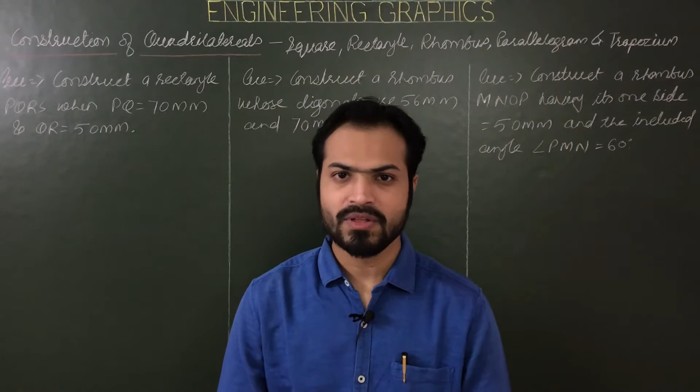So first of all, what is a quadrilateral? Quadrilateral means a figure of four sides, a figure in which the number of sides is 4. Under quadrilaterals we have square, rectangle, rhombus, parallelogram and trapezium.

A square has all four sides equal and all four angles are right angles. Right angle means 90 degrees. The diagonals are also equal and bisect each other at right angles. So square means all four sides equal and all included angles equal to 90 degrees.

Then rectangle has opposite sides equal and all four angles right angles, but all sides are not equal. Equal opposite sides and all angles are 90.

Next, rhombus. A rhombus has all four sides equal but none of its angles is 90 degrees. Greater than 90? Yes, possible. Less than 90? Again possible. But 90? No, not possible. And one more thing, in case of rhombus, opposite sides are also parallel.

Then next, parallelogram. Opposite sides are equal and parallel to each other, but angles are not 90. Opposite angles are also equal, but other than 90.

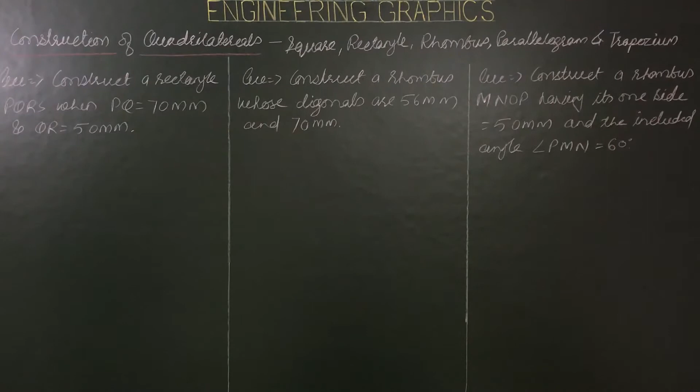Now construction work. First is a square, but we already covered how to construct a square in the previous class, so we will start from rectangle. First question: construct a rectangle PQRS when PQ equals 70 mm and QR equals 50 mm.

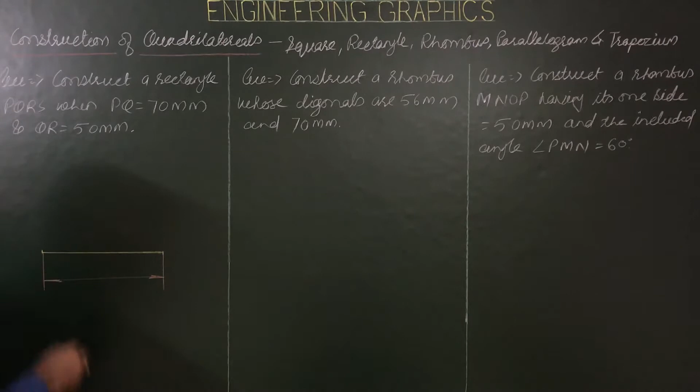So first of all, draw the first side of length 70 mm, and we have to show its length also. Draw extension lines perpendicular to the base and a dimensioning line parallel to the base and write its length 70. This is PQ, first end P, second end Q.

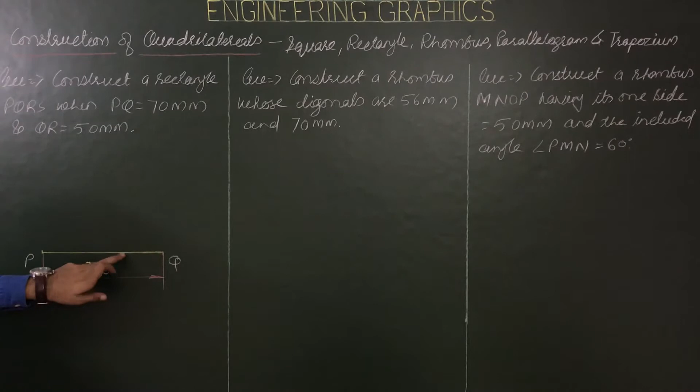Then QR is 50 mm. QR means the second side perpendicular to the first side, of length 50 mm. So draw the second side perpendicular to the first side with length 50 mm. Now this corner is point R.

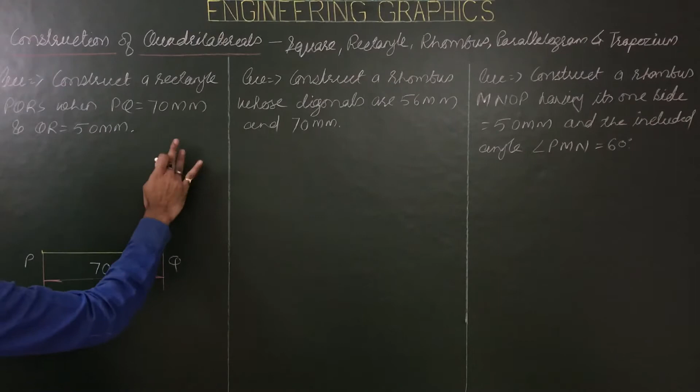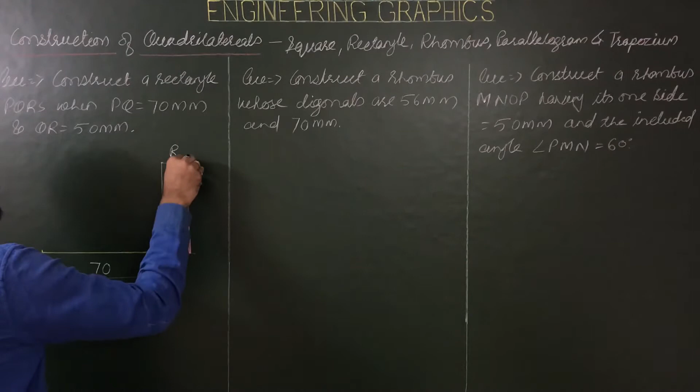Again we have to show its length. The length or height of RQ is 50, so we show this length also as 50. Now we have 3 points. What to do for construction of the rectangle?

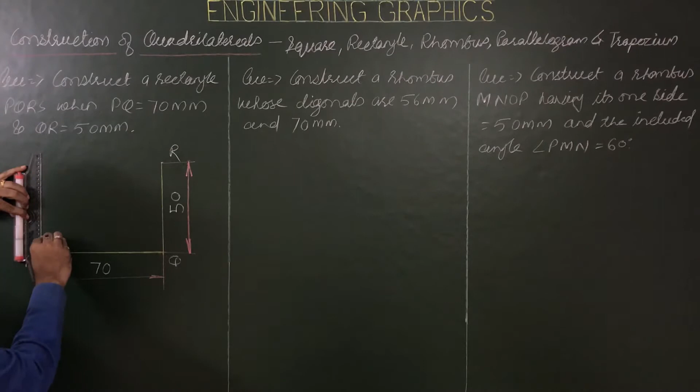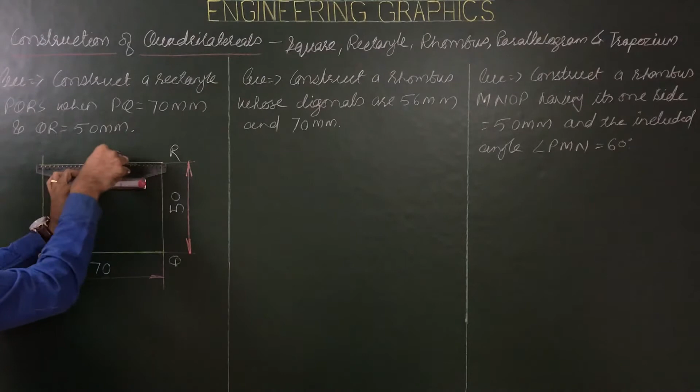Draw lines parallel to PQ from R and parallel to QR from P, or, since all angles equal 90, from P draw a line perpendicular to PQ, and from R draw one more line perpendicular to QR, because the basic concept is that all four angles must be 90.

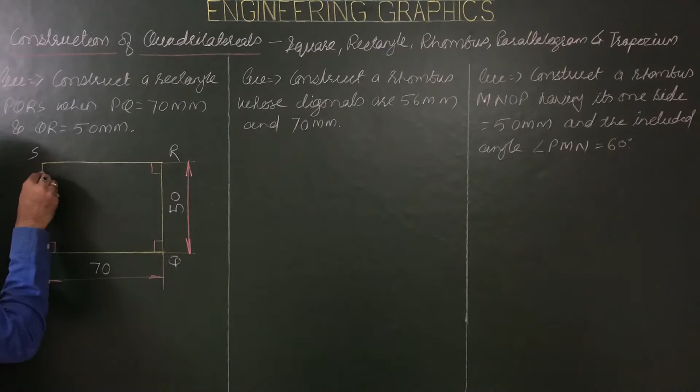So first draw the first side, then the second side, then from each corner another perpendicular, or simply draw a line parallel to PQ from R. We'll get this point. This is PQRS, so this must be S. And we have to show each angle is a right angle using the right angle symbol.

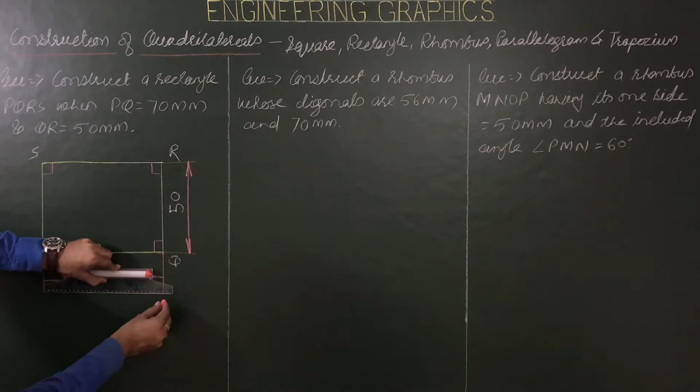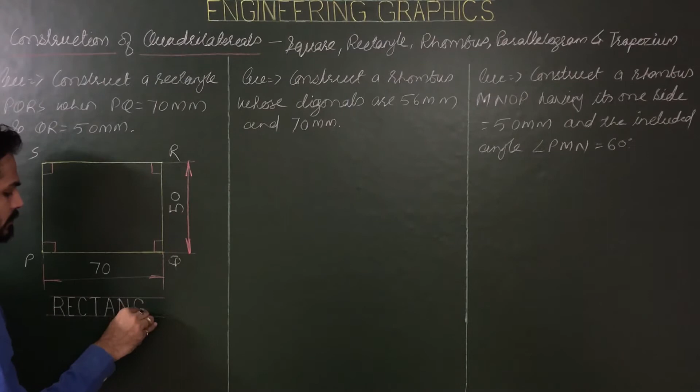Then if you want, write its heading, rectangle, with letter height 10 or 5 mm, or you can go for 8 mm also. Next, rhombus. Construct a rhombus whose diagonals are 56 mm and 70 mm.

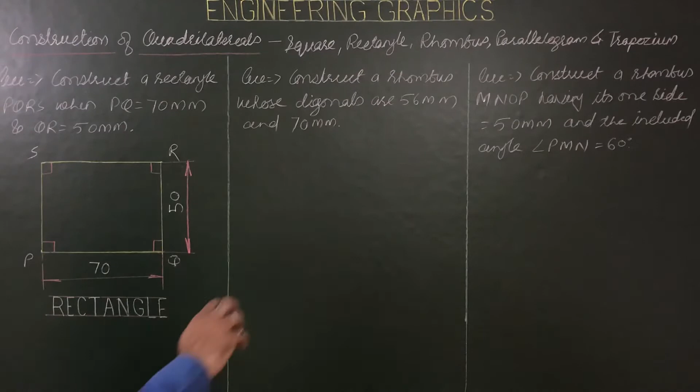So the first diagonal is 56 mm and the second is 70 mm. For a rhombus, diagonals are perpendicular bisectors of each other. The 70 mm diagonal is the perpendicular bisector of the 56 mm diagonal, and vice versa.

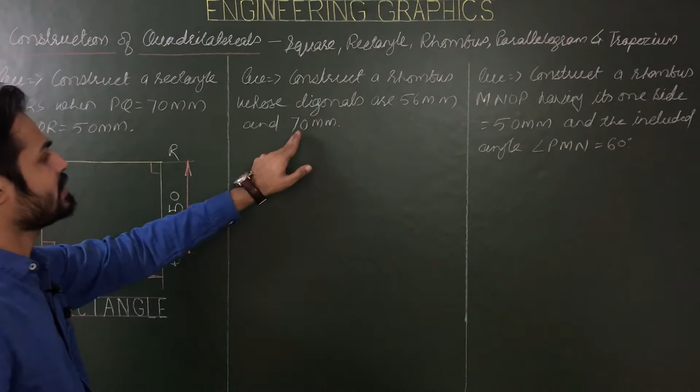So draw the first diagonal of length 70 mm. Then construct its perpendicular bisector using any suitable method. You can use the arc method: with any arc length greater than half, greater than 35, find 2 points and join them to get the perpendicular bisector.

Another method is to mark the midpoint of this 70 line, 35 from this end or 35 from that end. From this midpoint draw a perpendicular of total length 56.

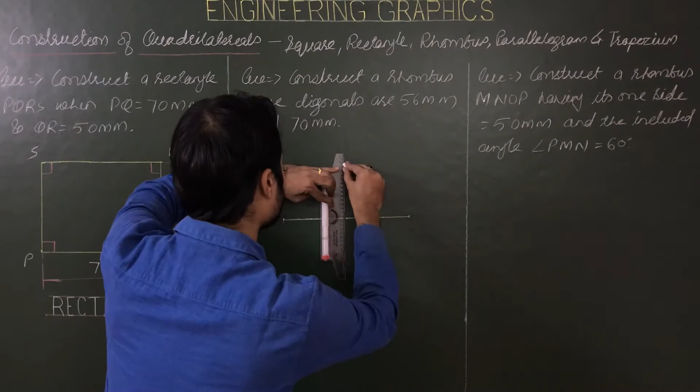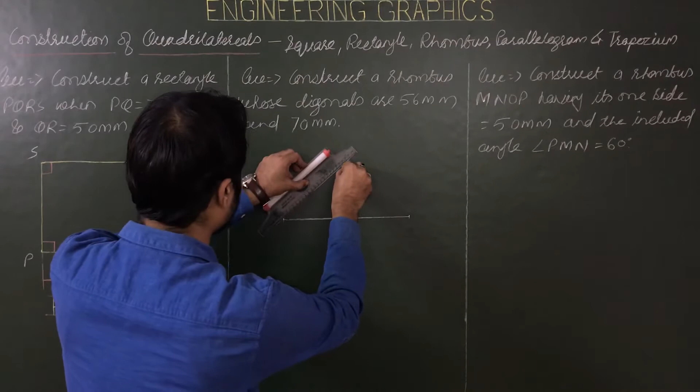So if total length is 56, then half of 56, 28 up and 28 down. So these are 4 end or corner points of this rhombus. Then what to do? Join all 4 corners with dark pencil and then do proper dimensioning.

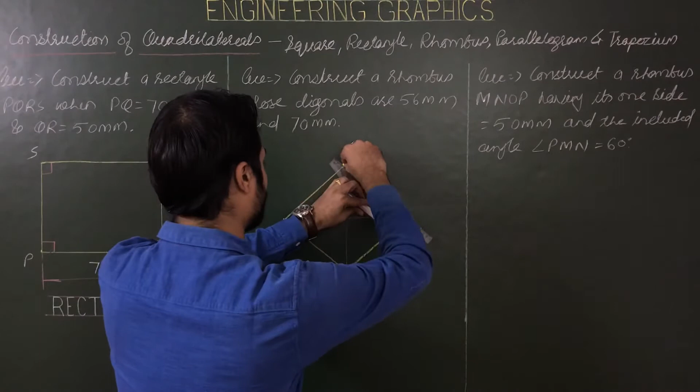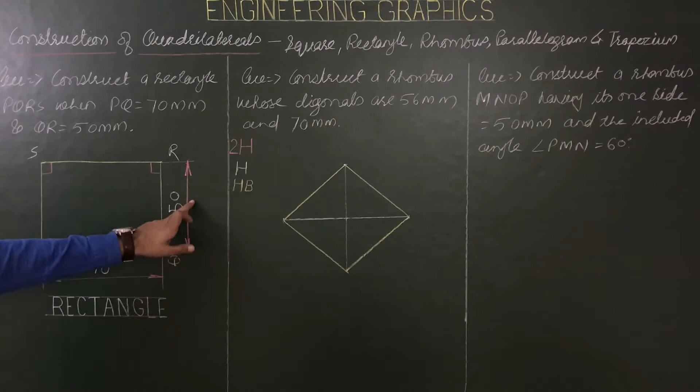One more thing, here I am using light pink chalk for 2H pencil or light work, then white chalk is for H pencil medium work, and for HB or dark work color is yellow. So these are color codes. For 2H, light or pink, so these are light work. H pencil is for all naming, medium dark work, and HB is for final work, final or dark work.

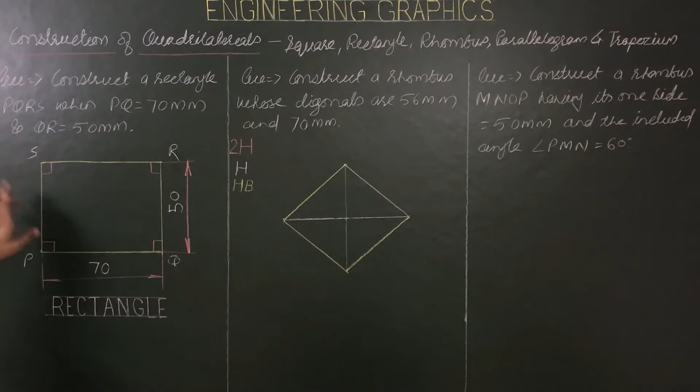Now for dimensioning, what to do? Draw extension lines perpendicular to the side and dimensioning line. Dimensioning line parallel to that side. Extension line, and dimensioning line. Dimensioning line always parallel to the side, and extension line always perpendicular to that side if possible. In extreme cases, we'll discuss what to do, what to modify.

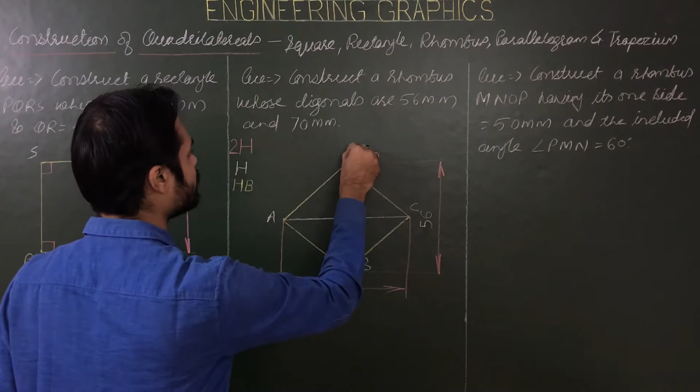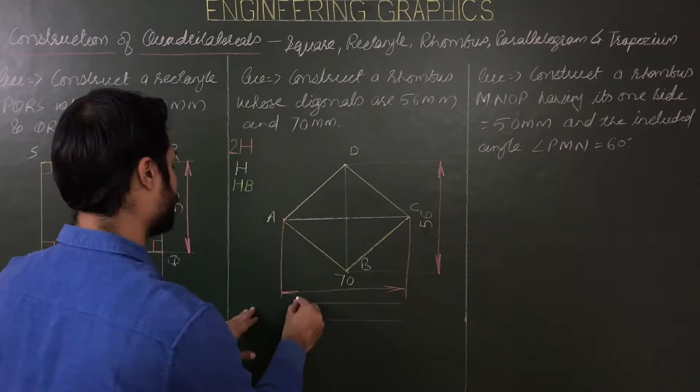Length is 70 and here the length is 56 mm. 56. And naming, say A, this point is B, this is C, and this is D. And last heading, rhombus. Right. So this is first type of rhombus.

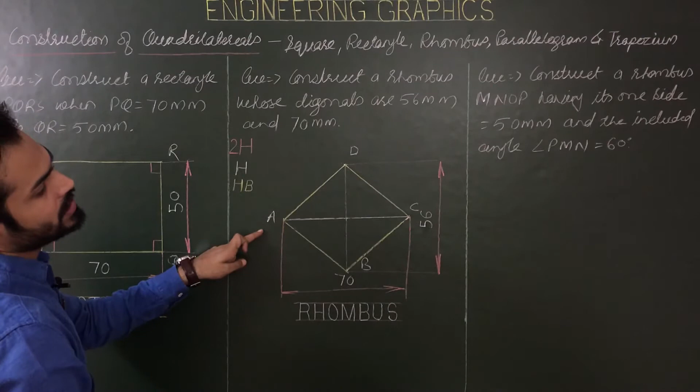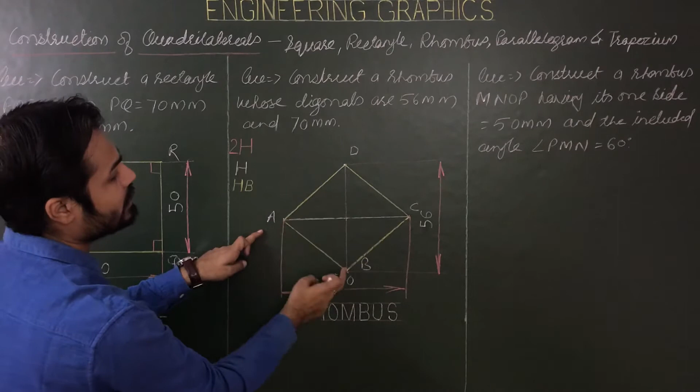The next, construct a rhombus MNOP having its one side equal to 50 mm and the included angle PMN equal to 60 degrees. So for example, say this is M, N, O and P. Side length is 50 mm, 50, 50, 50, 50, and the included angle PMN. This angle is 60. So this angle is 60, length is 50 mm, and we are required to construct a rhombus for this case.

So what to do? First of all, draw first side 50 mm long and do dimensioning for this side. This is 50. Then angle, first angle, say this corner is M, N, this must be somewhere here, and P. So angle PMN, this angle is 60. So draw another line at an angle of 60. This is 60.

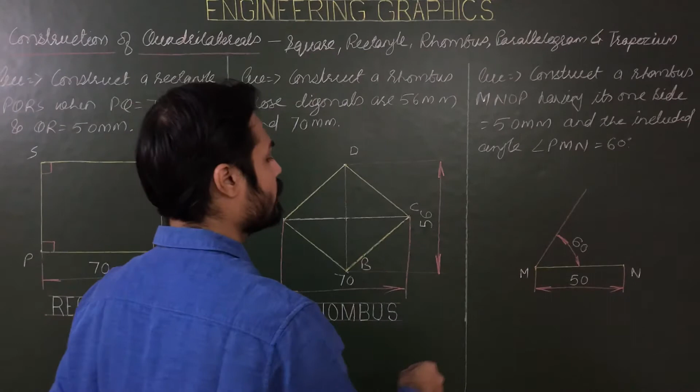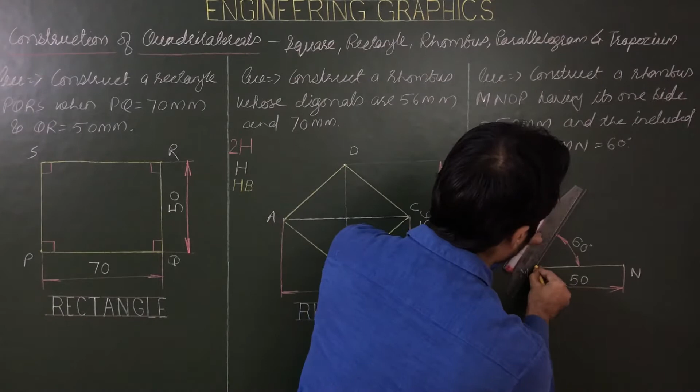Degrees, right? So the first side MN of length 50 mm, then angle at M is 60. So draw another line at an angle of 60 from M. Then we have to mark this length of 50 along this side. So mark length of 50 mm along this line. Now we have MN and MP. What next?

Then we have first option: from N as center and NO as 50, arc length is 50. Arc like this, and from P arc like this will do. Second is draw line parallel to MN from this point, line parallel to MP from N. Again we'll get this point O. And third option, try to calculate this angle. 60 is the angle, so 180 minus 60 will be 120. So measure of this angle will be 120 at N.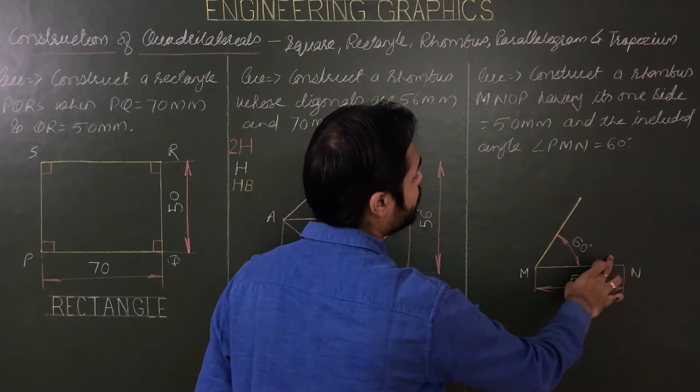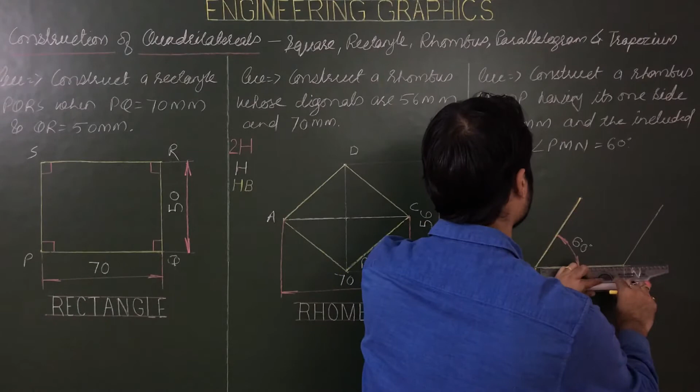So these are three methods for construction. You can go for first method, arc method, second method, parallel method, or third method using angle. After calculating that angle, you can complete your rhombus MNOP. So in this rhombus, angle PMN is equal to 60 degrees, and MN equals NO equals OP equals PM equals 50 mm.

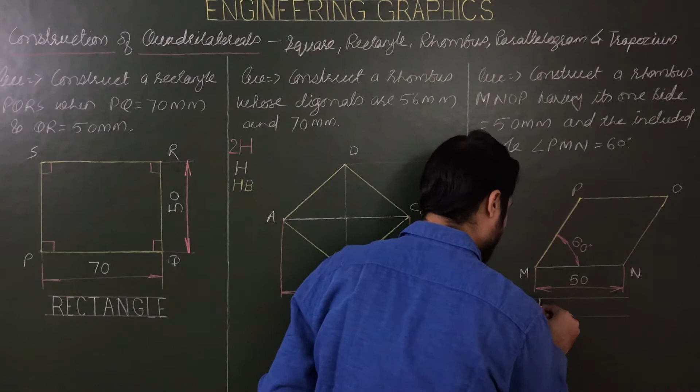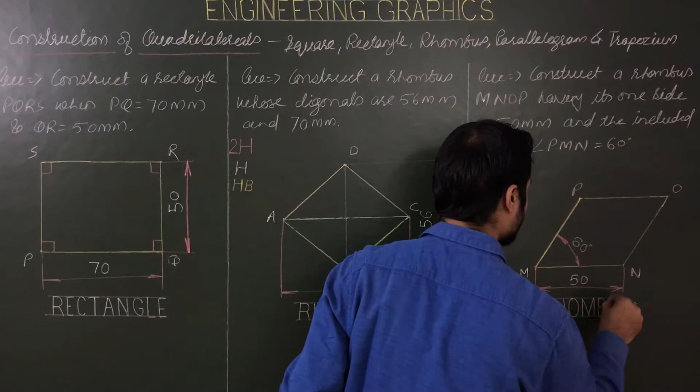Again, for naming, please follow all rules of single stroke letter writing, and if possible write rhombus like this in a letter height of 10 mm, 10 or 5 or 8. Better you take 10 mm for writing work.

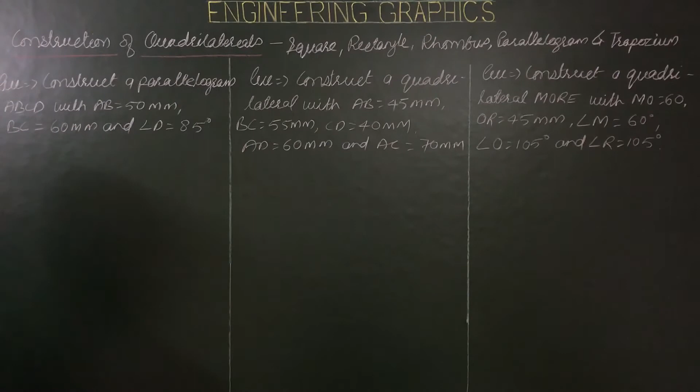Next question, construct a parallelogram ABCD with AB equal to 50 mm, BC equal to 60 mm, and angle D is 85 degrees. It means first side of length 50, second side of length 60, third side again 50, fourth side 60. Say this is A, B, C, D. AB of length 50, BC of length 60, CD and DA. Angle D is 85, so opposite angle B will also be 85. And angle A will be 180 minus 85 equals 95.

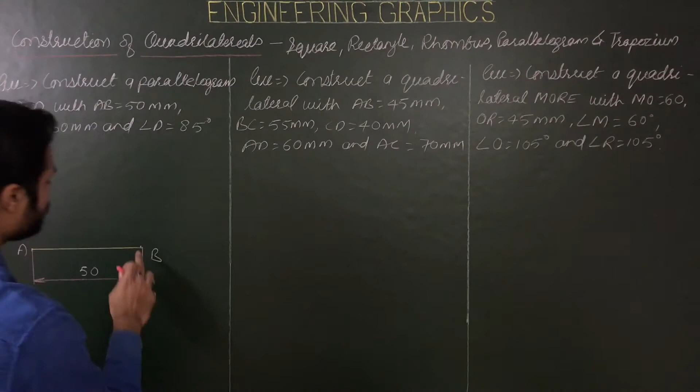So what to do? Draw first side AB of length 50 mm, this is A, and this point is B. Do proper dimensioning and write its length 50 mm. Then from second corner B, we know that the angle is 85 at D, so the angle must be 85 at B. So from B draw another line at an angle of 85. Say this is 85. I am not going to check this angle.

So this angle is 85 from AB, with reference to AB, and the length from B to C. From B to C the length is 60. So from B mark a length of 60 mm for C.

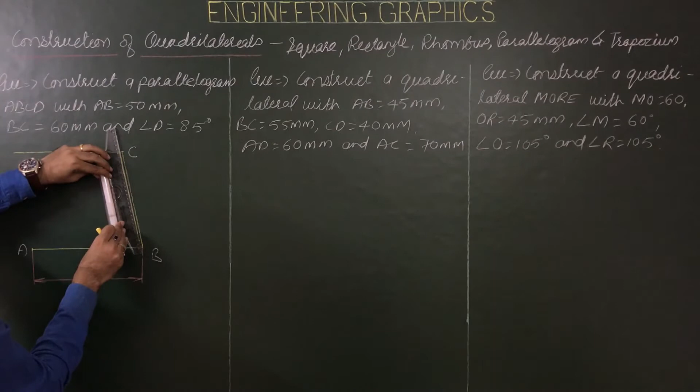Now draw lines parallel to the first side and parallel to the second side. So draw a line parallel to AB from C, because in this question we are trying to construct a parallelogram. Parallelogram means parallel lines. So draw a line from C parallel to AB, and from A parallel to CB.

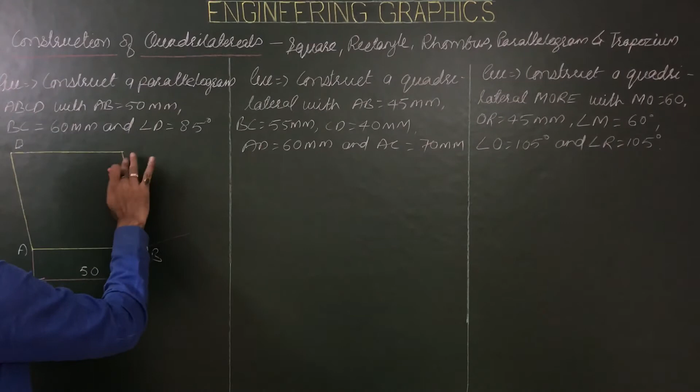Yes. And these corners are A, B, C, and last is D. This corner is D. And we have to show its length also. So for dimensioning, draw perpendicular to this side, or perpendicular of BC, like this, and the length is 60 and this point is C, okay, acceptable.

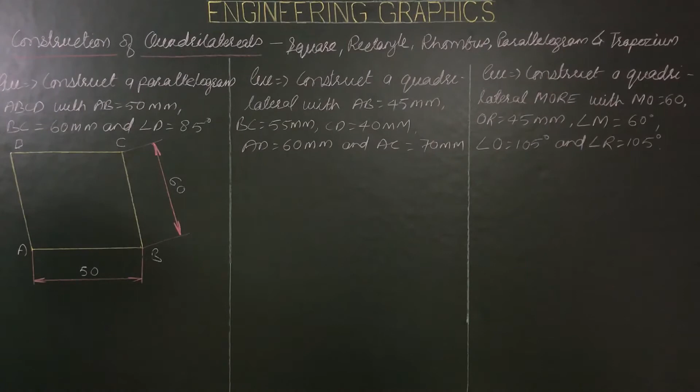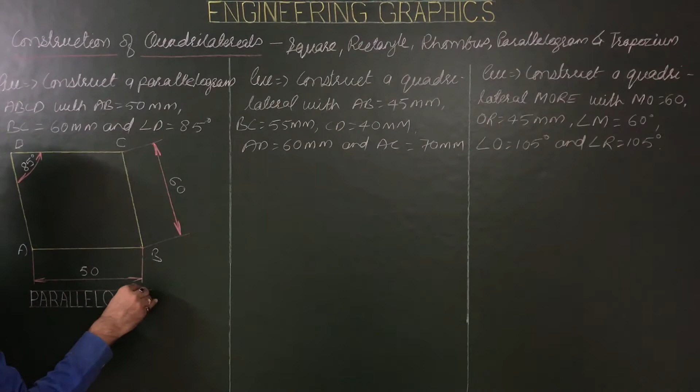And the angle at D is 85 degrees. Now naming the parallelogram. So write parallelogram. So this is the final answer.

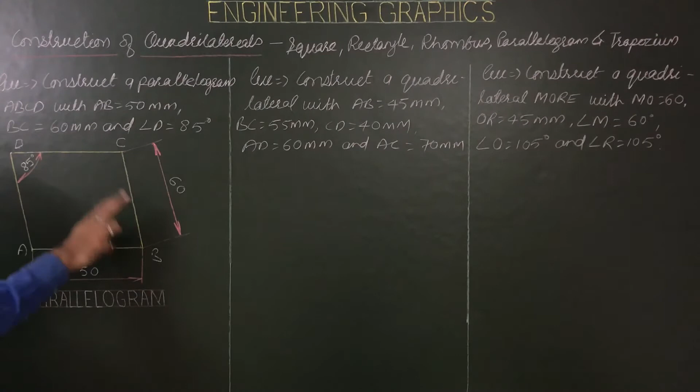Parallelogram of side AB equals 50, BC equals 60, and angle D is 85. If D is 85, B must be 85. And what about A and C? Angle A equals angle C, which will be equal to 180 minus 85 equals 95.

Now next, construct a quadrilateral with first side AB equals 45, BC equals 55, CD 40 mm, AD 60, and AC is 70 mm. So this quadrilateral is a combination of two triangles: ABC, first point A, second point B, third point C, and second triangle ACD. So please try to focus on the first part, first triangle ABC.

Do we have enough data for first triangle ABC? AB is 45, then BC is 55, yes, and CA is 70. So what to do? First of all, draw the first side of length 45, that is AB is 45 mm long. So draw AB of length 45 mm. So the length is 45, which we have to show here, 45 mm.

Then B to C, BC is 55 and A to C is 70 mm. So what to do? B as center and BC equals 55. From this point, arc of 55 mm for C, and then A to C is 70. Just a minute, from B, C is 55 mm and A to C is 70 mm. So the common intersection point is point C. A to C 70, B to C 55.

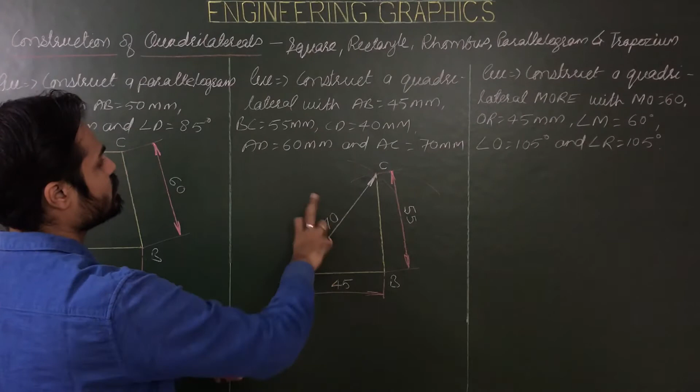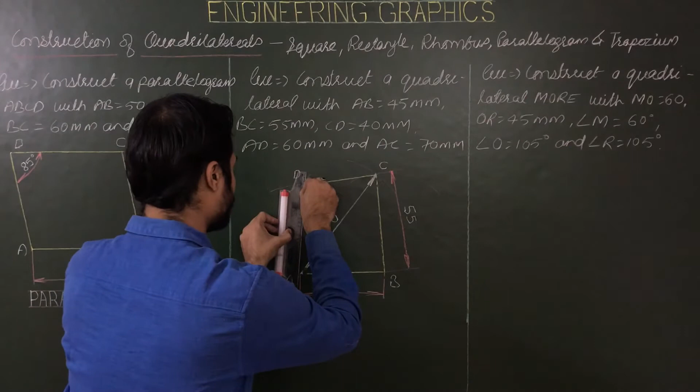Then from C to D is 40 mm, A to D 60 mm. So from C to D another arc, and A to D arc of 60. So A to D 60 is arc length, from C to D 40 is arc length. This is the last point D. Again what to do? Join C to D and A to D, and then dimensioning for CD and AD.

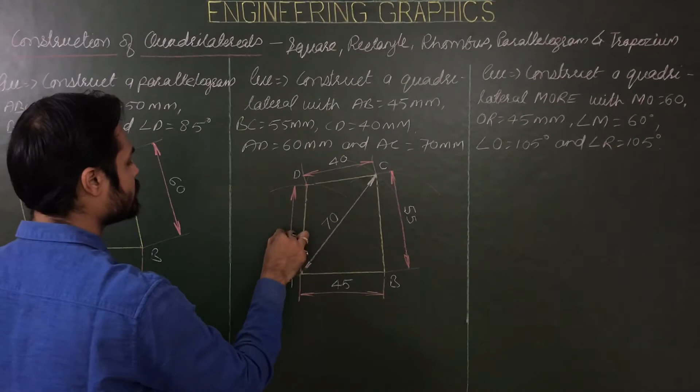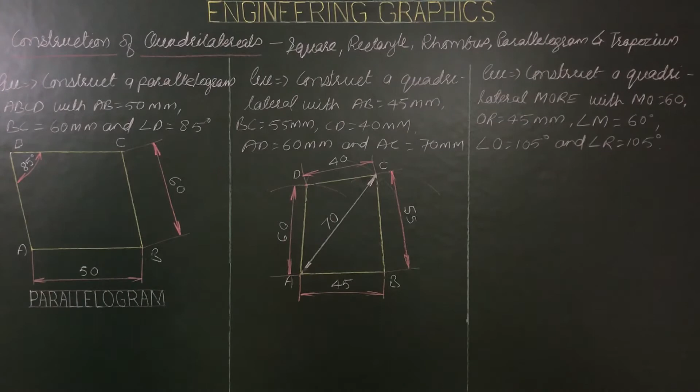CD is 40 and AD is 60. 40, 55, 70, 45. Yes. So this is the final answer. Quadrilateral AB 45, BC 55, CD 40, AD 60 and AC 70 mm. Last, write its heading: quadrilateral.

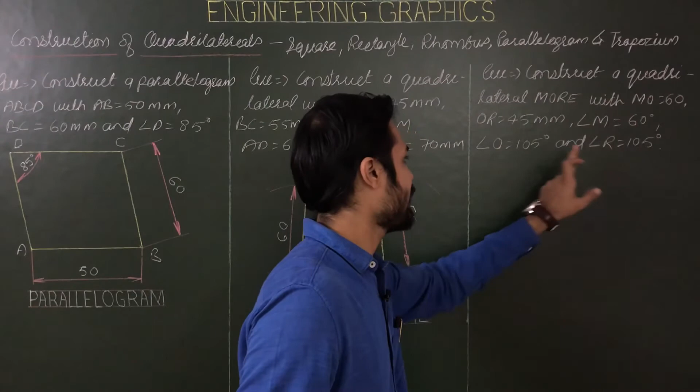Next question. Construct a quadrilateral MORE with MO equals 60 mm, OR 45, angle M 60, angle O 105 and angle R 105. So in this problem, two sides and three angles are given to us. So first of all, draw the first side MO of length 60 mm.

This is MO, M to O. Mark them, M and O. Then do dimensioning for MO. M to O is 60 mm. So write 60. Now from O, the angle at O is 105 and length OR is 45. So what to do? Better to go for the angle first. So draw a line for OR at an angle of 105.

This angle is 105 degrees. So from O to R. Now mark point R on this line, and the length is equal to 45. So again we have to show this length, line of length 45. So this is 45 mm, and the naming of this point is R.

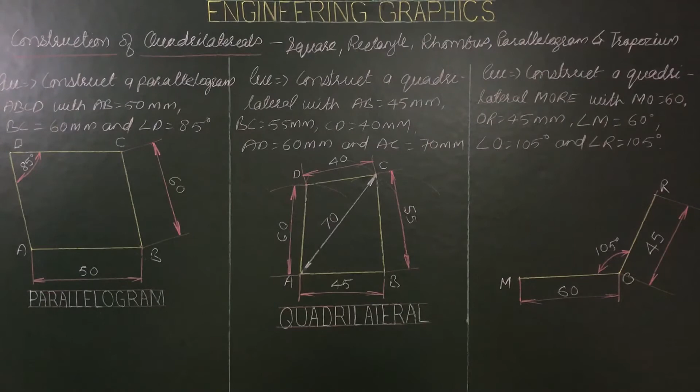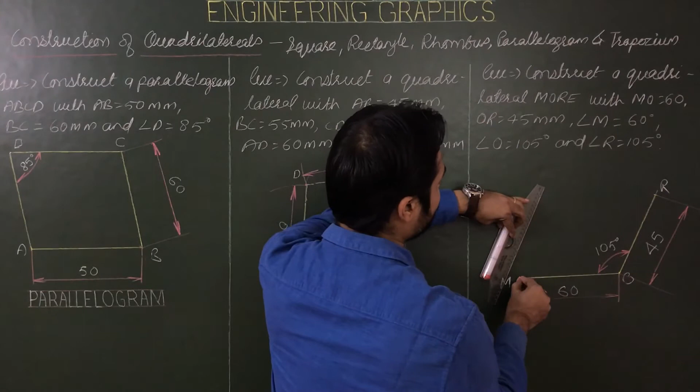Then we have angle O 105 done. Angle R is 105, and angle M is 60. So from point M, draw another line at an angle of 60. So this angle is 60 from this side, M to O. From this line the angle is 60. So draw an angle of 60

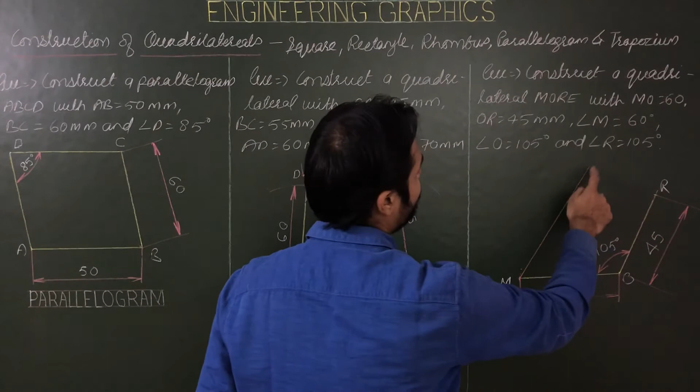degrees like this. And from R, another line at an angle of 105 from this line. So this is perpendicular, and after measurement please draw an angle of 105. This angle is 105. This is 105 again.

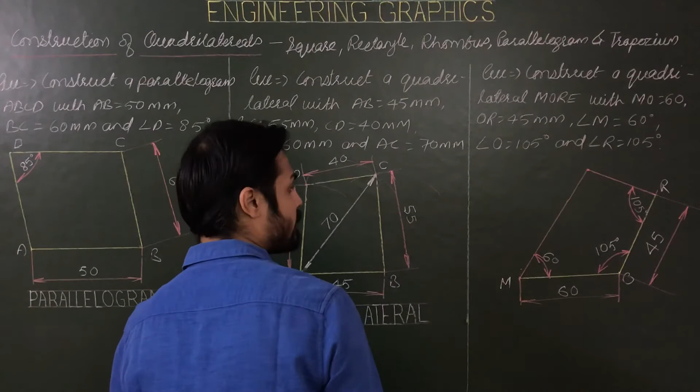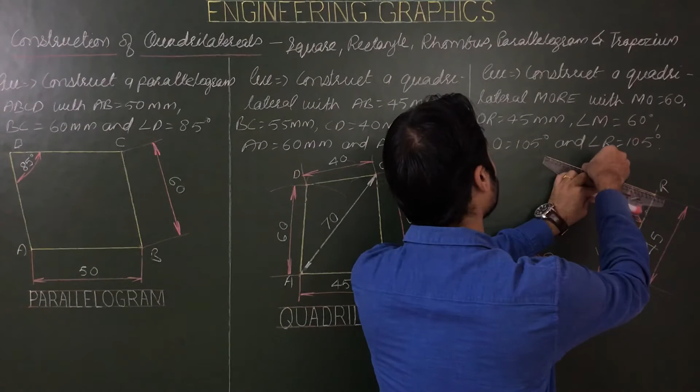105 degrees. And this is 60. Angle over here is 60. Now we have all four corners and all four sides, so you can use dark pencil for final outline. And the last point is M, O, R, and this is E.

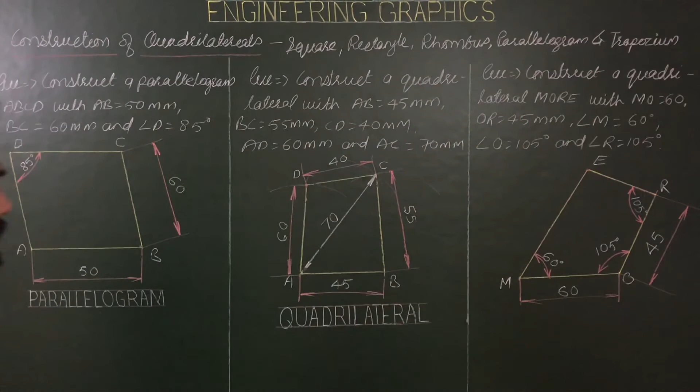So in this figure, MO is 60 mm long, yes. O to R 45, yes. Angle at R 105, angle at O 105, and angle at M 60. Angle at M is 60 degrees. Again, write its heading, quadrilateral. I'm not writing here because we have to repeat it, quadrilateral, for the last question.

Next question. Construct a trapezium ABCD having its sides AD equals to 30 mm, DC 25 mm, CB 35 mm, and the difference of parallel sides is 20 mm. Now, personally, for this problem, I don't think the data or given statement is enough. I think some extra data, some extra information is a must for solving this problem.

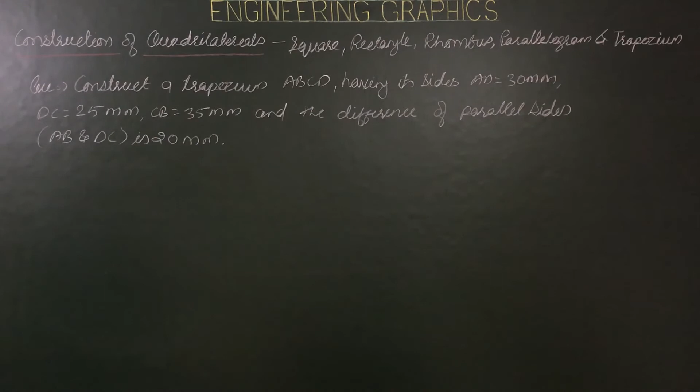So, assuming that AB and DC, these are parallel sides. One more thing, whether AB is greater than DC or DC is greater than AB. So we will assume that length of AB is greater than DC. So parallel sides are AB and DC, and AB is greater than DC. So now for solving this problem, first of all, calculate length of AB. Length of AB equals to the difference 20 plus length of DC. 20 plus 25 equals to 45.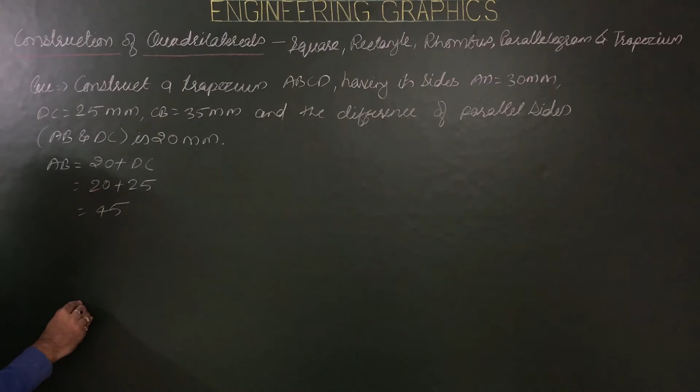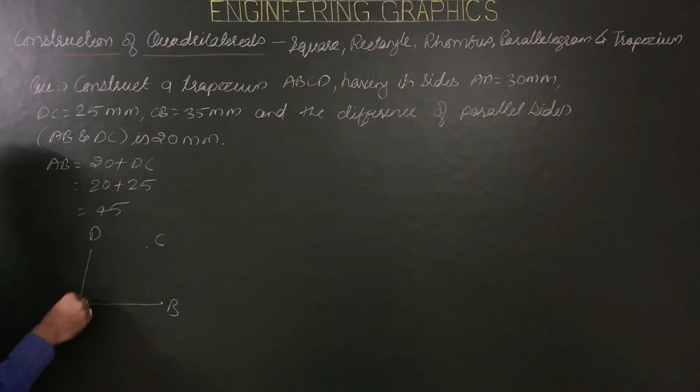Now AB and DC, these two sides are parallel in this trapezium, so we'll try to construct A, B, say this point is C, and say this is D, and this is the trapezium. Approximately this is the trapezium. So DC is parallel to AB. Now in this trapezium, one more thing, difference of AB and DC is 20. So if we locate that point E, this distance is 20, and this is 20, and this is total

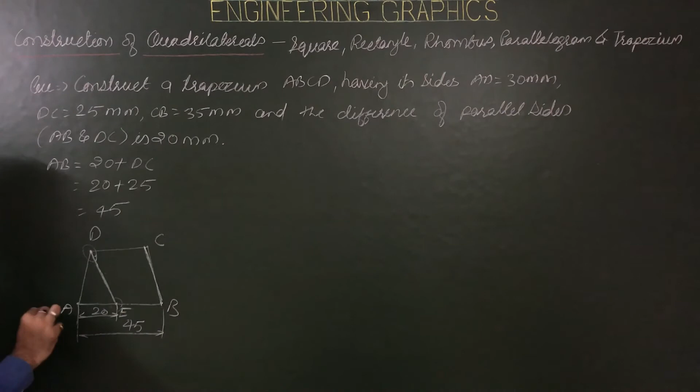45. Then according to the theorem of trapezium, if you draw a line from E parallel to CB, from E, this is the line, the common intersection point will be D. Or if we draw a line from D to the point at a distance of 20, the difference between these two sides, then this side and side CB will both become parallel. So using this theorem, now we have to construct this problem.

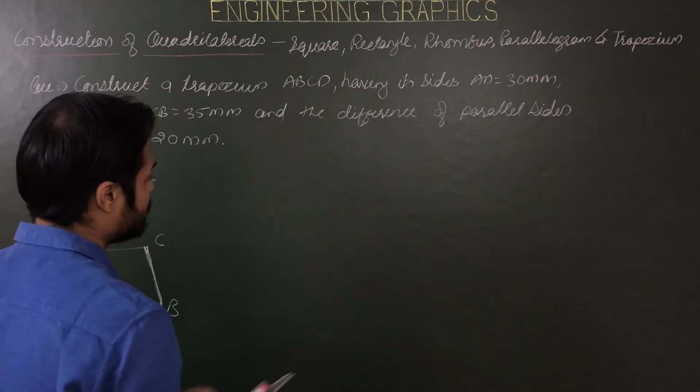So first of all, draw first side AB of length 45. So draw first side of length 45, AB, AB length equals to 45. So we have to show this length also. Length is 45, and then please mark point E for construction work. So A, E and B. AB is 45 and A to E is 20.

Now what to do? Now we know that from E to D this length is equal to CB. Both are parallel and these two sides are already parallel. So lengthwise CB is equal to DE, and the value of CB as per problem statement is 35. DC is, where is DC? DC is 25. AB is 45. Yes. What about A to D? D to A or AD? AD is given to us, yes, 30. So AD is 30, DC is 25, CB is 35, and now AB is 45.

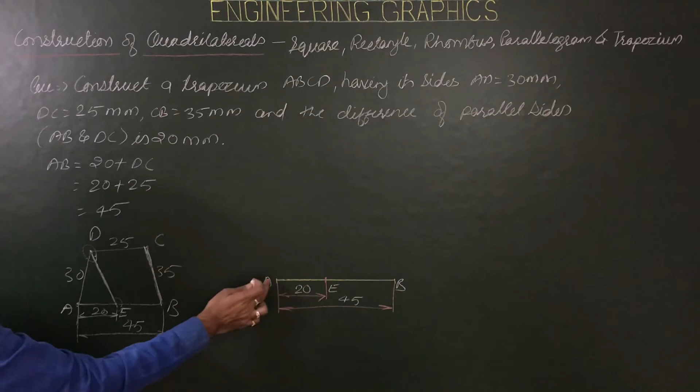So from A to D, arc length of 30, from E to D, arc length of 35, because this side is equal to CB. We can locate this point D. So first arc from A, arc length equals to 30 or radius equals to 30. Then from E, radius equals to 35. This is point D. This point is point E.

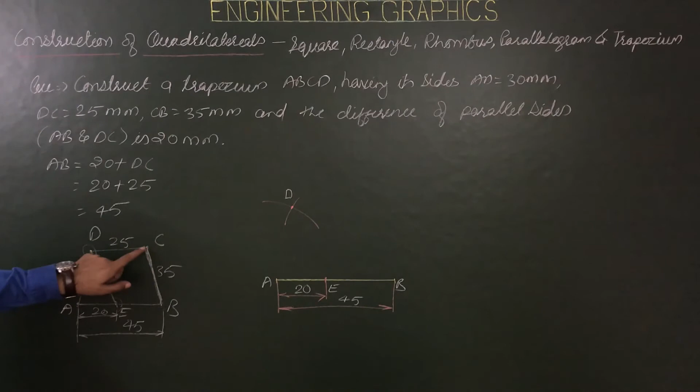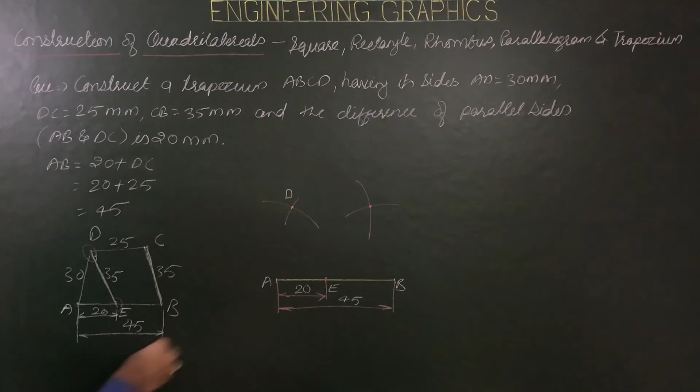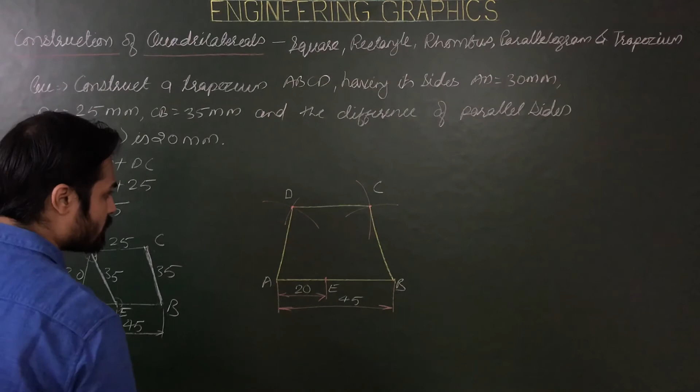Again, from D to C, 25. From B to C, 35. So arc length of 25, center as D. And arc length or radius equals to 35, center as B. This point is C. So now we have all 4 points, point A, point B, point C and point D. And if you want to show, just show that DE is also parallel to CB, right?

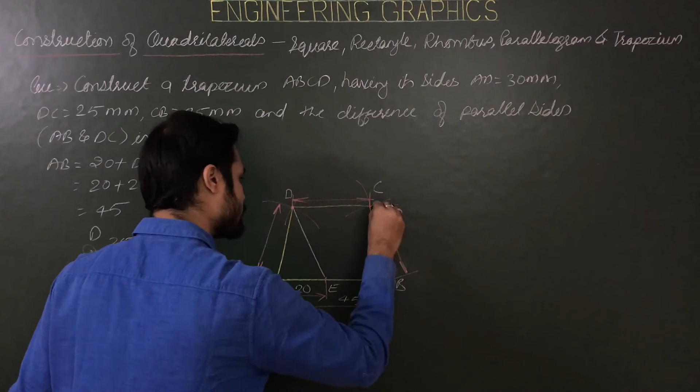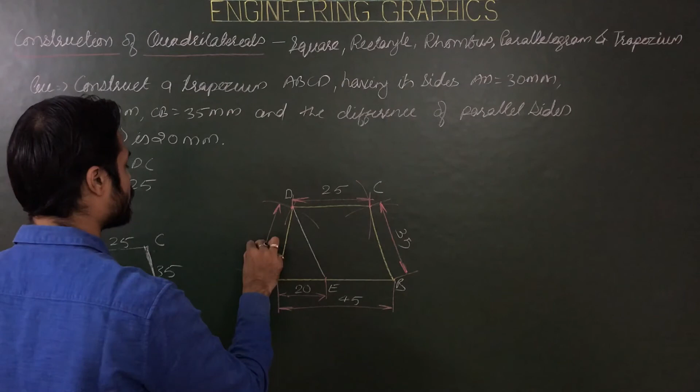And after doing this, please do dimensioning for all sides. Length of AD is 30, then D to C, this is 25, and B to C is also given to us. B to C is 35, D to C is 25, and AD or DA is 30. So we have to show all these things in our final drawing. And last, write its heading if you have enough time. Trapezium.

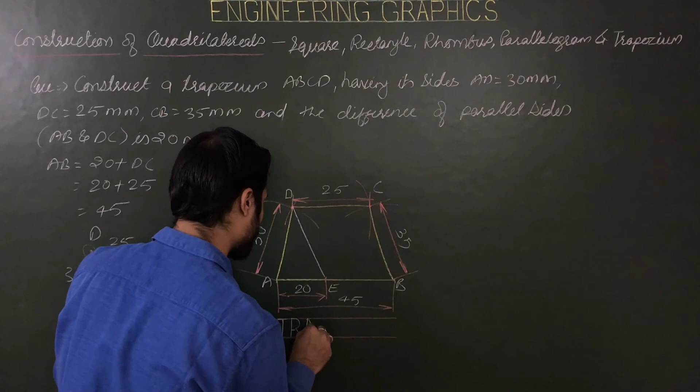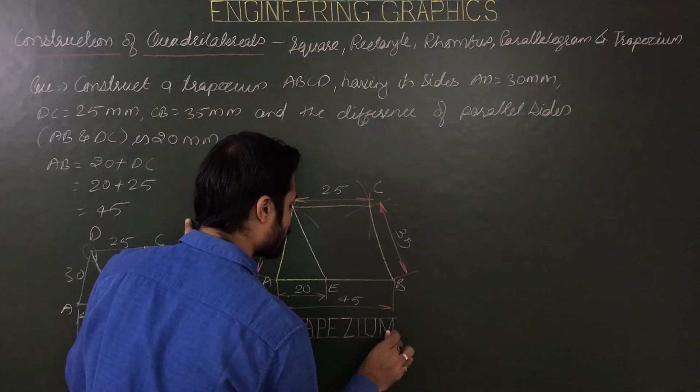Right. So this is all from my side. Please draw all these problems on your sheet. Do proper dimensioning, do proper naming, and please use proper pencil for construction work.